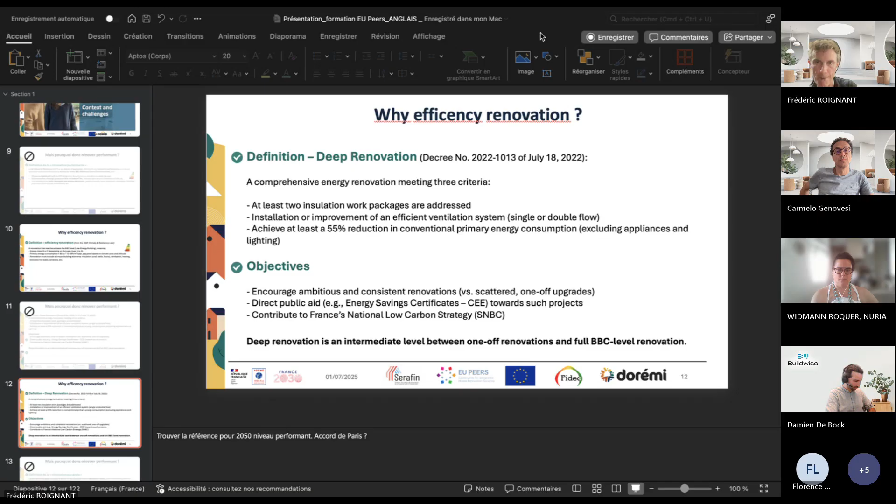We have a technical issue with slide sharing. Frédéric asks if we are still on slide number 2, and confirms it should have changed. After some back and forth, the presenter tries to share the document again, checking whether slide 12, then 14, are visible, and adjusts the window being shared until everyone confirms they can see the correct slides.

Thank you everybody. So I was telling that there is a second definition, which I call deep renovation, which is a little bit different from the first one. Here you will see we just have two insulation works, whereas in the first one we have more, 4 or 3, 1.

It's the question of the ventilation system. Here you have the choice between single or double flow, and we have a criteria of improvement of the reduction rate for conventional primary energy, which is a little lower than the first definition's objectives.

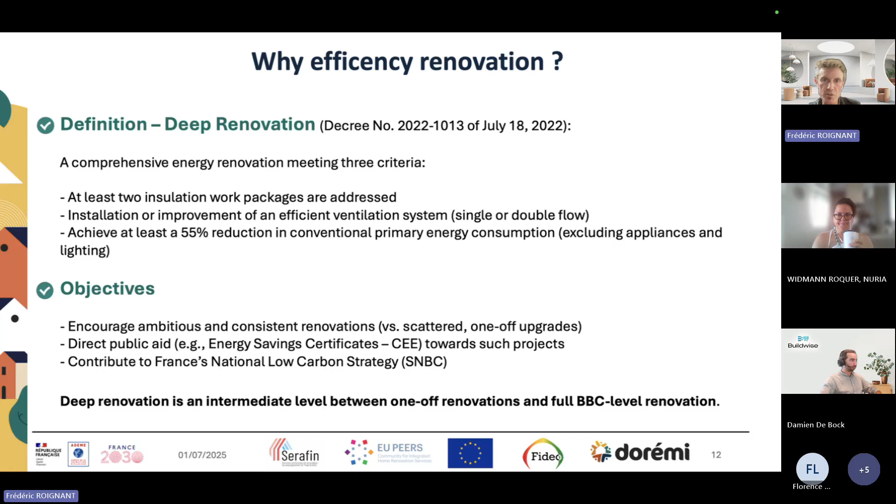On slide 14, you have the definition of the one-off renovation, which is the largest gesture work done for the moment in France. For example, it's just changing a window or insulating or replacing a boiler, but without a global reflection on the work we have to do to reach very high efficiency.

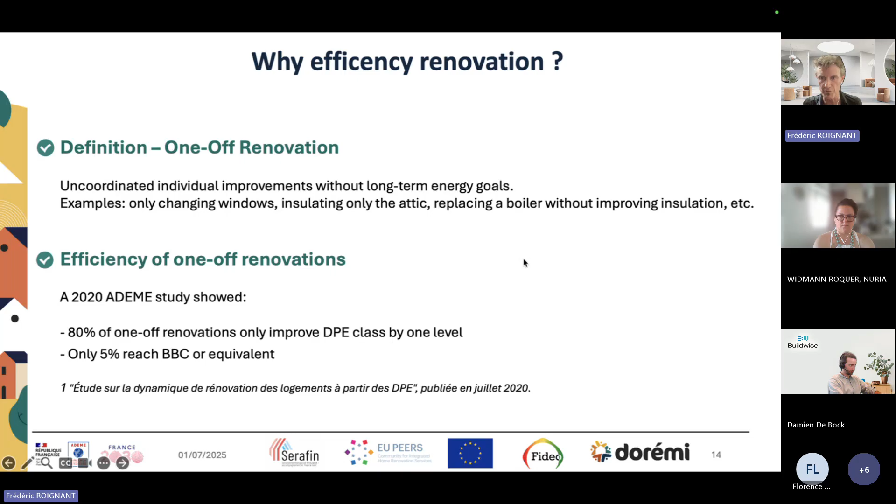For DOREMI, we are not very pleased with this definition because we have a contribution from ADEME, a French institution, in 2020, which shows that 80% of one-off renovation is not capable of improving more than one level on the DPE, the scale of evaluation of improvement, and only 5% reach the BBC level or equivalent. So at the end of the day, we see that one-off renovation work is not the one that has to be continued or supported to reach the climate level in 2050.

So why do we talk about efficiency in renovation? As you can feel today, it is because we are facing global climate change. But more than that, we will also face a social goal. We have a big amount of energy poverty in France, and working to improve efficiency in renovation will create local and non-relocatable jobs here in France and in every country, supporting territory development. So besides the climate goals, we also have social and economic goals, and surveys show that we can expect about 8 million energy...

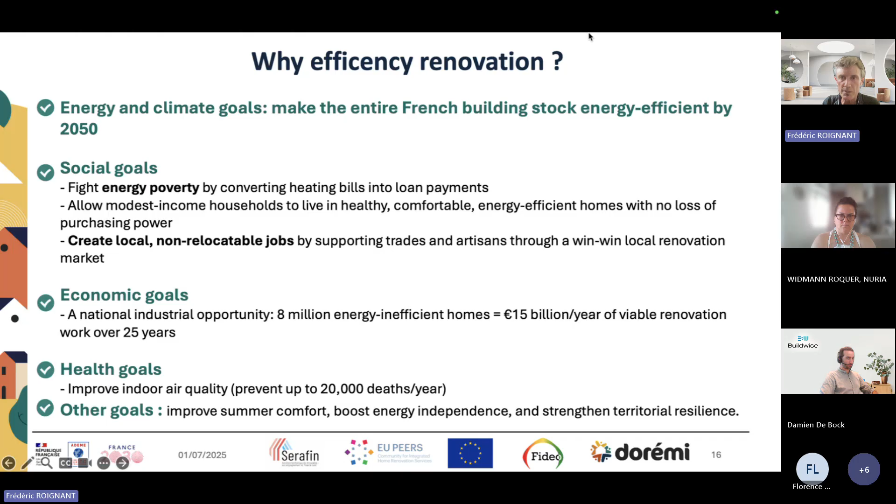This is a major point because we are dealing with efficiency renovation today. For DOREMI, we want efficiency renovation to be accessible for all people when it's well planned, optimized, and well managed. It's not just for people with good revenue.

So we need to regard financial planning and project coordination to ensure we succeed in this work. For us, efficiency renovation means good health quality in the home, comfort, and consuming very little energy.

Now chapter 2. It's not sufficient just to talk about energy in a renovated home, but we want to be sure the energy performance is real when the work is done. So we will see how we are organized in DOREMI to achieve this goal.

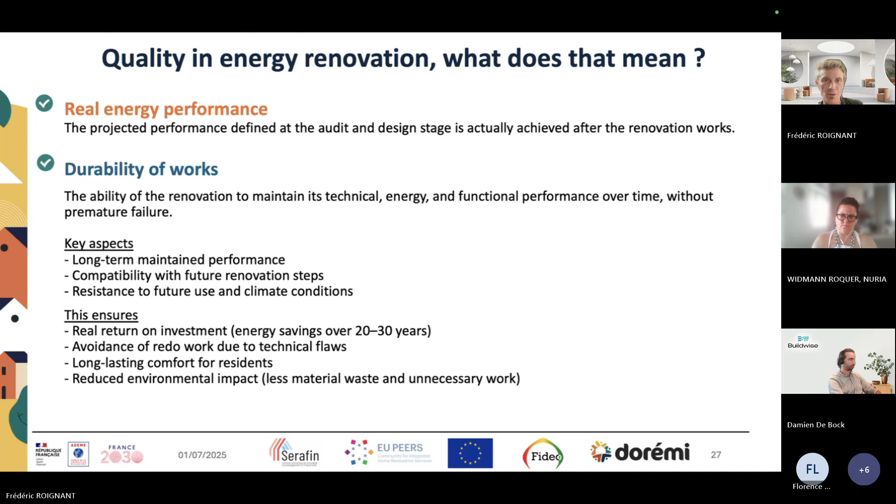Sorry, there is a title in French. This is what quality in renovation means. For the user, it means first of all comfort and a healthy residence.

We know that 30% of households report difficulties staying comfortable in their home during cold winter. We will see there's an increase, because in 2020 the figure was just 14%.

Another point is satisfaction from the user's point of view. For them, this is the first priority, coming largely before other aspects like green space or urban development. So this is a very important point.

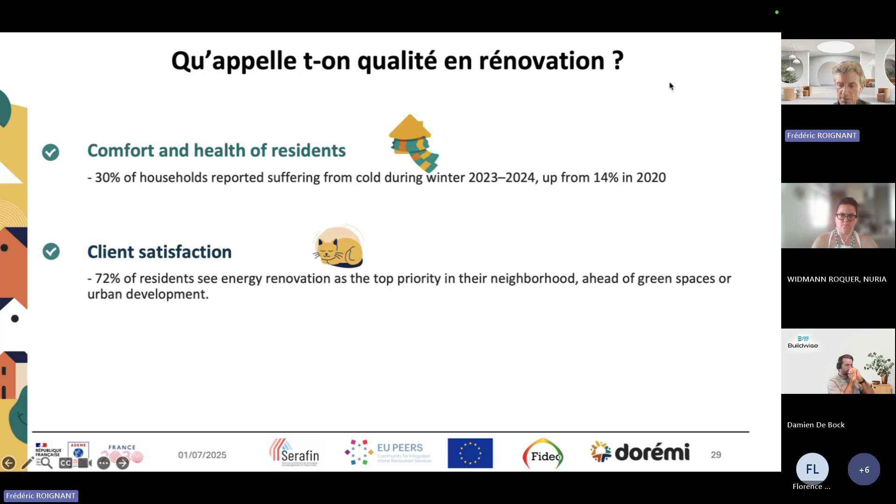Let me talk about DOREMI in a few words, so you understand how we are organized. We are part of a larger group, the Negawatt group. We were born in 2017, coming from the Negawatt Institute, a kind of think tank thinking about transition in a global point of view for France, energy and environment, and changing society's way of thinking.

The point is DOREMI was created to face the demand for renovation, essentially in old houses. We are independent, but also founded by great companies like Schneider or Edilians.

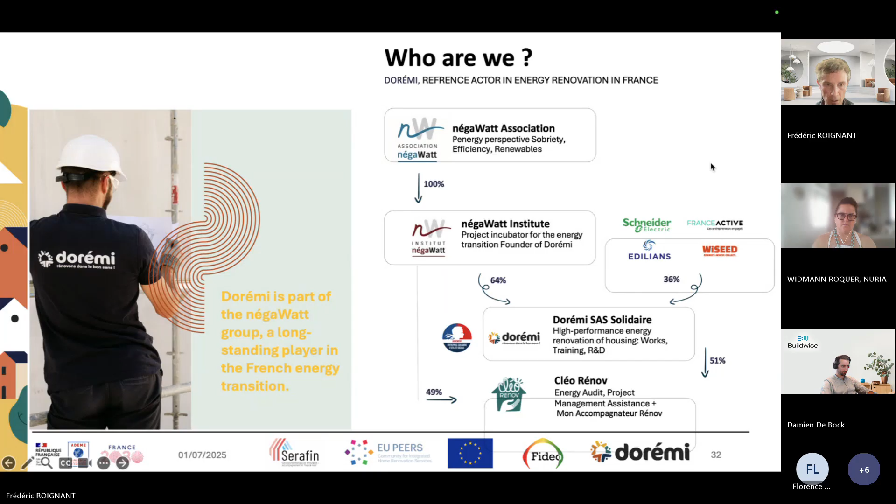The strength of DOREMI is that we are organized in 3 major parts. There is DOREMI Formation, which is training, one of the 3 pillars of our organization. We also have the Lab, which deals with research thematics with partners, French and European. And we have DOREMI Work, which is the field way of doing high quality renovation.

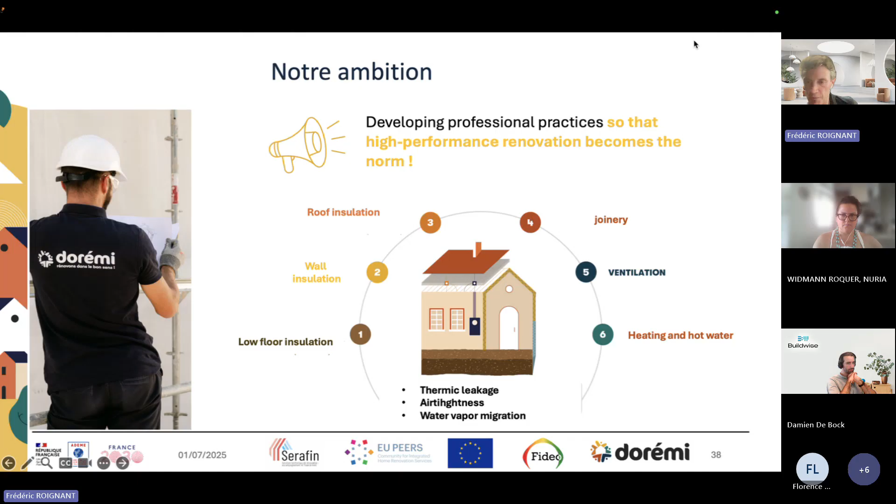This is very specific because this way of thinking about renovation is not widely shared by people in the field in reality. So let's go deeper into how we are organized to do that.

Let's talk about pillars of quality. It's like many proofs of quality. Let me explain one of them.

Based on this scheme, we can reach high performance energy renovation in 2 ways. The first one, and the major one up to this time, is the project in one step. It means we will find fundings, technical solutions, and have no blocking from the households.

These are the 3 conditions which make it possible to do high performance renovation in one step. When the context is okay, it's the major way to work, but it's not 100% possible. So we choose to have another solution: a high renovation project in 2 steps.

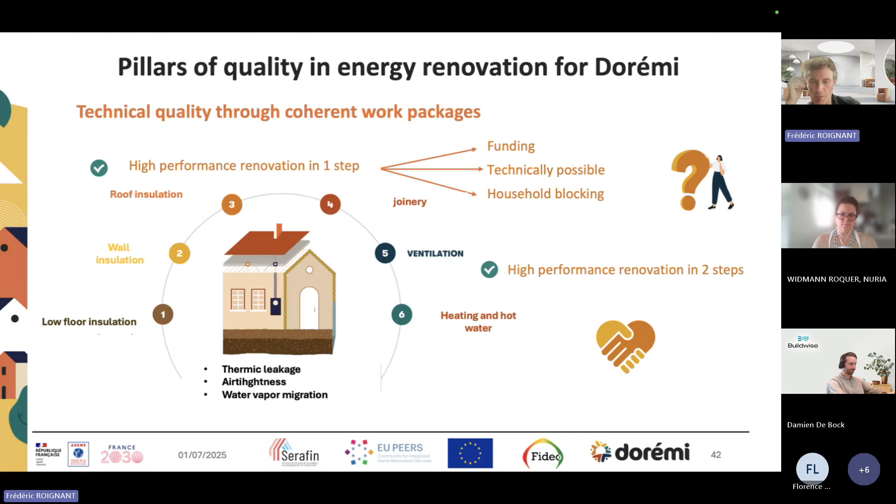For this second way of doing things, we made a study with ADEME just to know how we have to proceed. The result of this study shows that it's possible to do a high renovation energy project in 2 or maybe 3 steps, but not more, because the curing of the wall is needed from the beginning.

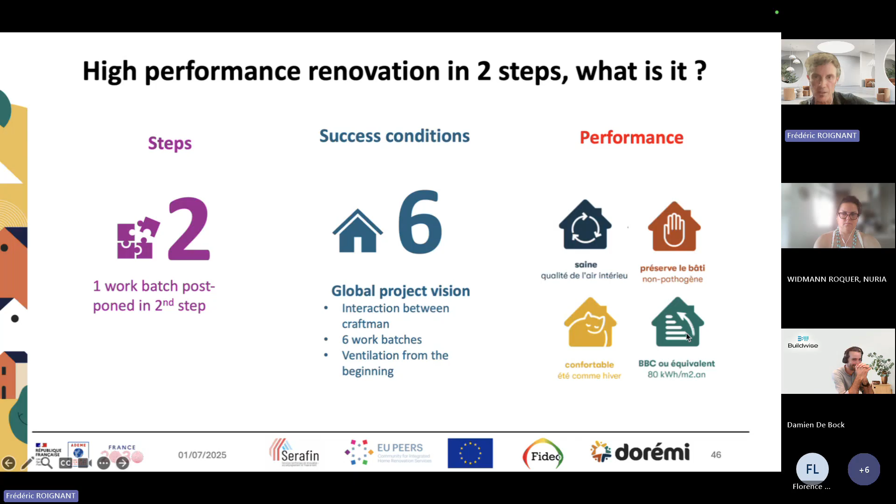To sum up the conditions needed to have performance in work over 2 steps: we need the 6-pack of work plus the interaction between craftsmen, which is very important to ensure quality. We know we have to treat the ventilation from the beginning, because once it's networked, it's more difficult to make the work at the second step. If we have this condition, we know we can reach the same performance as if we did the work in 1 step.

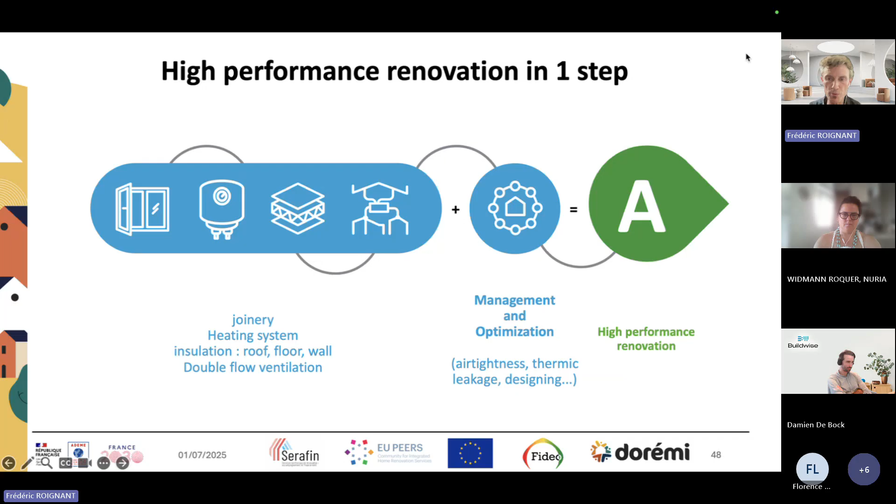So, another scheme. The conditions to get high renovation performance in 1 step are these: this type of work includes joinery, heating system, insulation, double flow ventilation, and 3 more things: air tightness, thermic leakage, and designing.

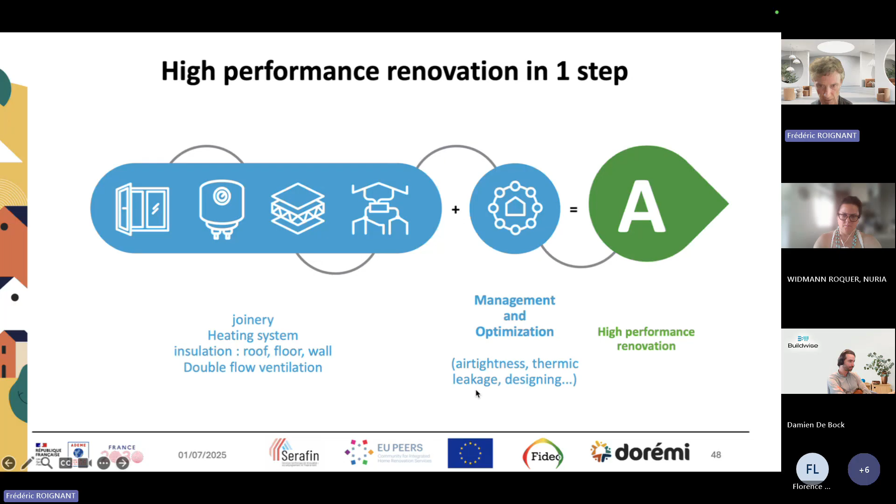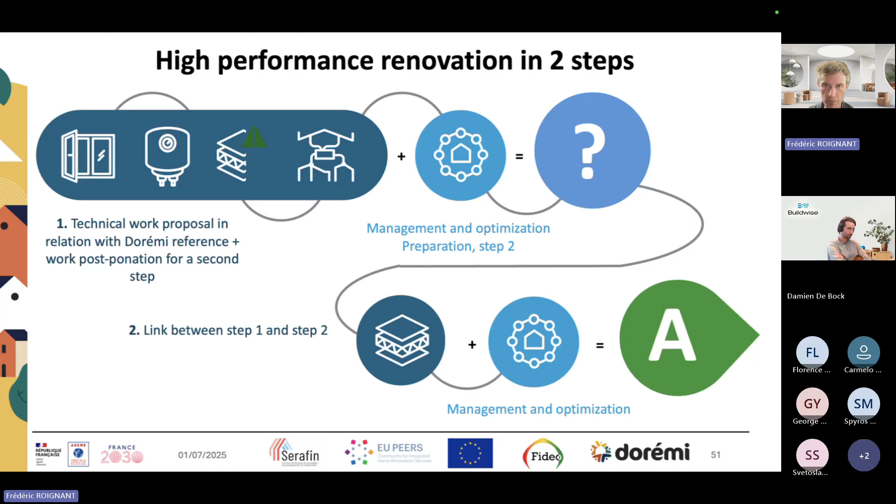If we want to do the work in 2 steps, we'll start with some work, and afterward we have to optimize and make it possible to do the complementary job in step 2. But we have to deal with and design this from the very beginning of the project. So it's more complicated, but it's possible to have the same result at the end.

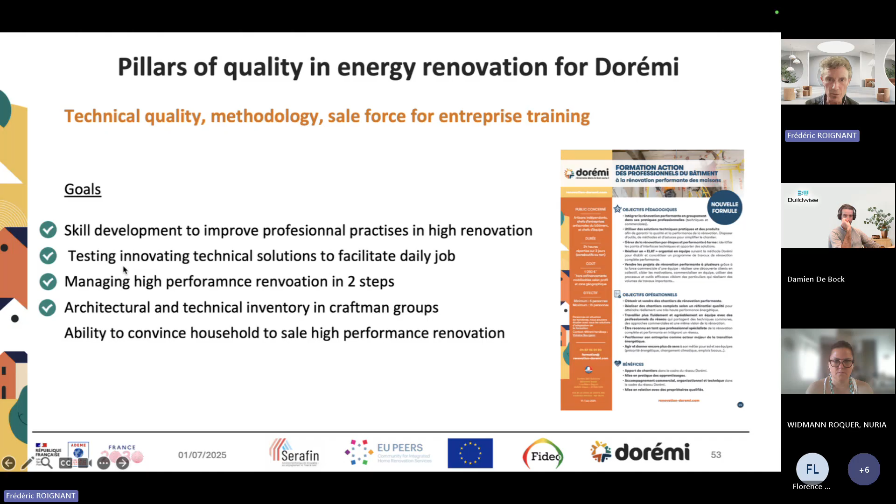We also have the same kind of trainee program, but for experts who go along with them during the beginning of their collaboration with the craftsmen. We know experts, but they are also trainers. This one is a 4-week program. We talk about training, teaching postures, and how they have to be faced with the craftsmen and the household.

And we talk about the way of teaching and managing a group of craftsmen, and sometimes it's not very easy. We also talk about technical expertise, sales, and organization.

So this is another point. We talk about training for enterprise, for teachers, they go with craftsmen. But we also have an organization for household because they want to have someone to talk with during the project from the beginning to the end. So we have a commercial offer which takes them from the very beginning, the first contact by phone, to the reception of work, usually about 10 months or more.

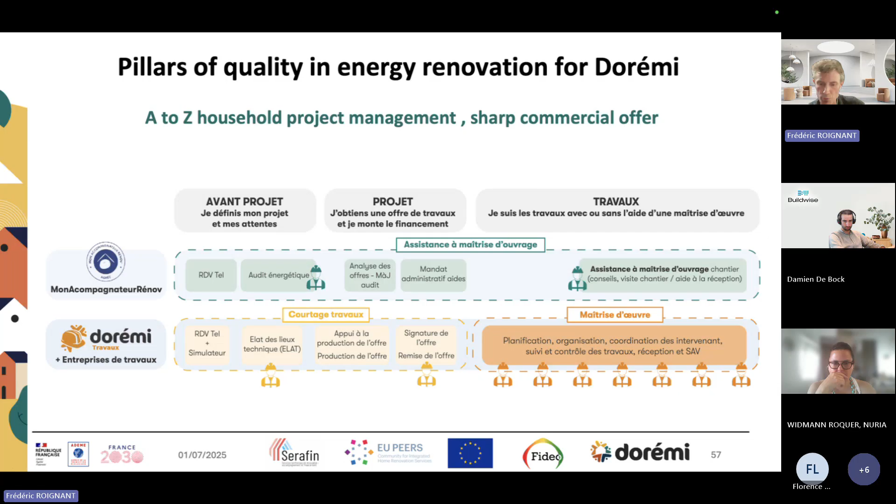Collaboration. So on this scheme, you got, sorry it's in French, but just to show you the different stages, there are numerous, we have to be present with household. It's not an easy job, but it's very necessary to reach quality at the end.

So to show you in another way, in the middle of the slide you've got the household. When the work is finished, they are comfortably settled in their house. But before that, we have to face steps coming from the one on the top left to the one on the bottom left.

So the first one is designing a pre-qualification program in collaboration with the household. Then after, the trainer goes with the craftsman group to design a technical and financial estimation for the work.

Then after you have the step where, after the project is signed, the craftsman group makes the work together, but they are guided by the trainer and the expert from DOREMI.

Before the end of the work, we have a very important stage, which we call the N50 test. It is the way to show whether the airtightness is good or not, and it is the time we will discuss if we need complementary work to reach the expected quality. Finally, the last step is the reception of work by the whole craftsman group and the trainer.

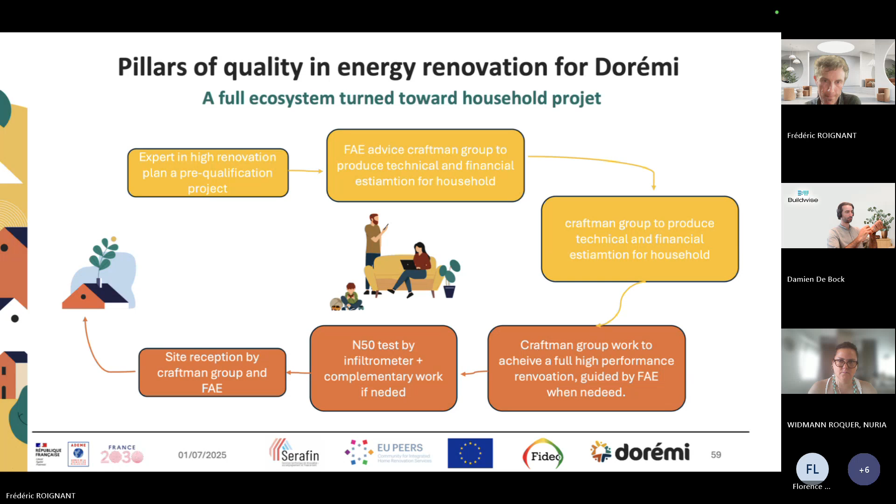So this slide is just to show you the major steps for a renovation project from the point of view of the user, the household. More or less it is the same meaning as the coming slide, so I'm going to be very fast on this one.

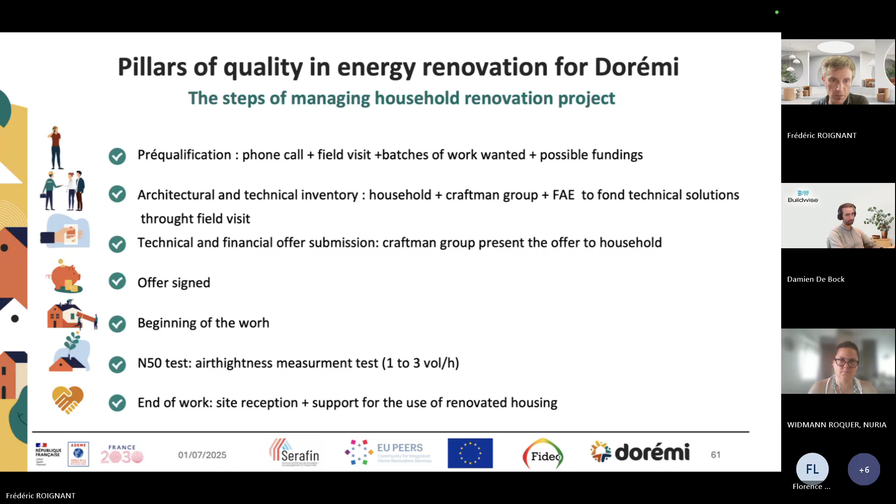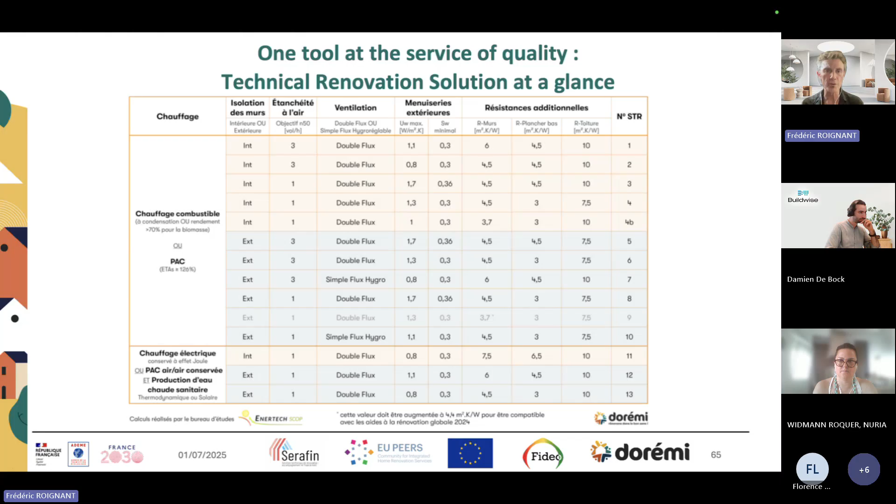Then when you go along, you just have to follow the line, and after you reach a number of solutions, which is a pre-thought way of designing the project. So we don't need to do any long thermal study for this particular project. We know that in this kind of condition, we can reach a BBC level, a low consumption for houses, just by following this grid, more or less. So it is a way to stay simple in engaging work, and this is also very useful to talk with the household.

Another major point for DOREMI is that it's not just designing quality on paper, but quality is made because we are present at each stage of the project. Before the craftsman group makes the proposal to the household, we have control. Before the engagement of the household, we have a control. During the work we have control, one of them being the N50 airtightness test, and we also have control many times during the work.

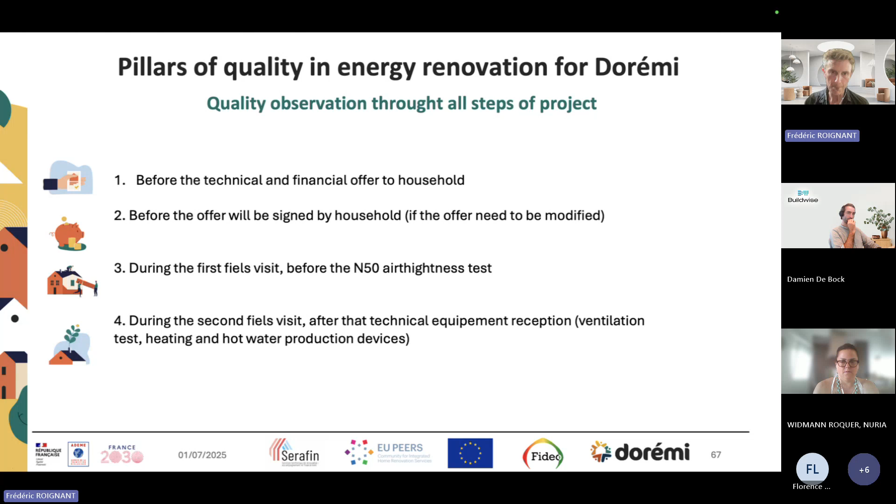We also got an intern software to follow up the project. As you know, we are spread across 5 regions in France, so we have numerous projects at the same time. We need to be very organized to know what's going to happen, who are the projects and where they are, to make adjustments if needed. This software, called L'Appli, is just an intern software, but I want to show you how we are organized on this side.

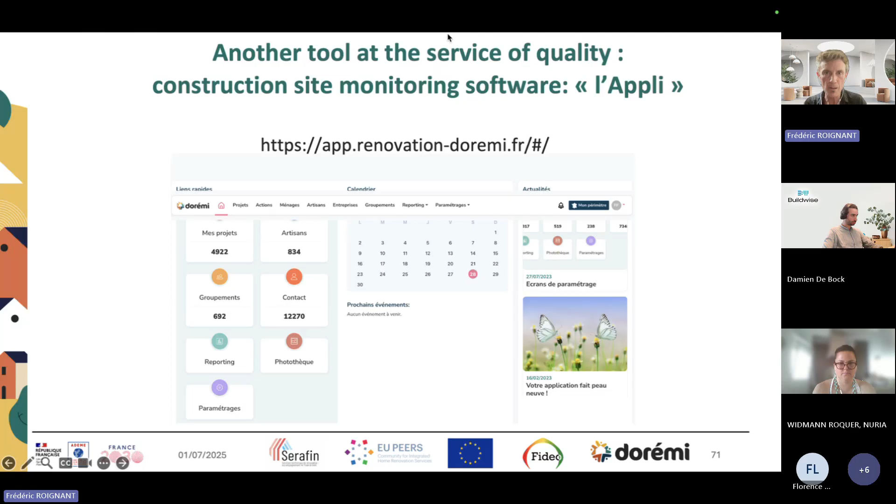Okay, so I have to just, sorry. I'm going to make a jump to this software, if it's possible, and I'm going to share it with you just after. Okay, where is it? Tick-tack, tick-tack, here. Okay, just a few moments please. Okay, so it doesn't work. No.

Okay, here we are. Okay, so let's try, I'm not very good with sharing documents. Do we see something different than before? Yes, no? Yes, it's perfect.

Okay, thank you. So here you've got the project. I'm not going into detail, just a quick overview of the software. Here is the list of projects we are dealing with at the moment. I'm choosing this one, so you can see an organization.

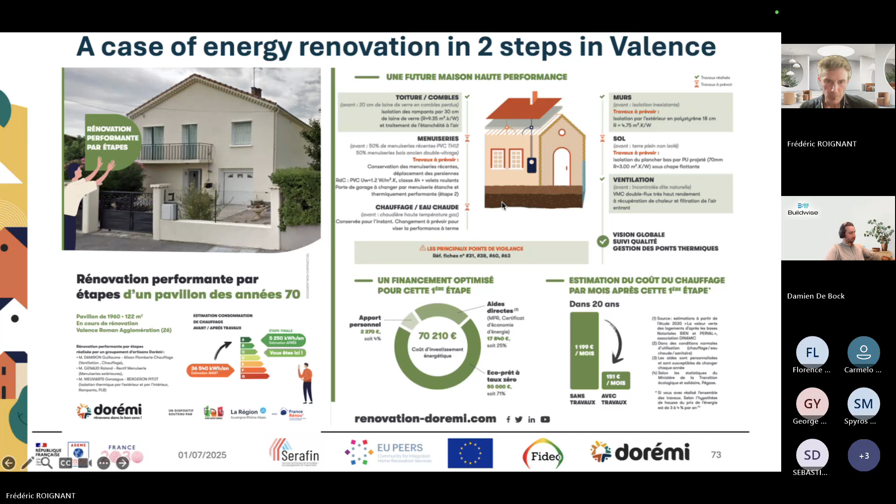Here you've got the detail of the type of work designed for the first step in black, and in red for the second step - so this is a case where it was not possible to do renovation work in one step. This document is discussed with the household, and if needed, there are references in red and black to a technical guide they can refer to if they need to go deeper in understanding the technical work they are going to have.

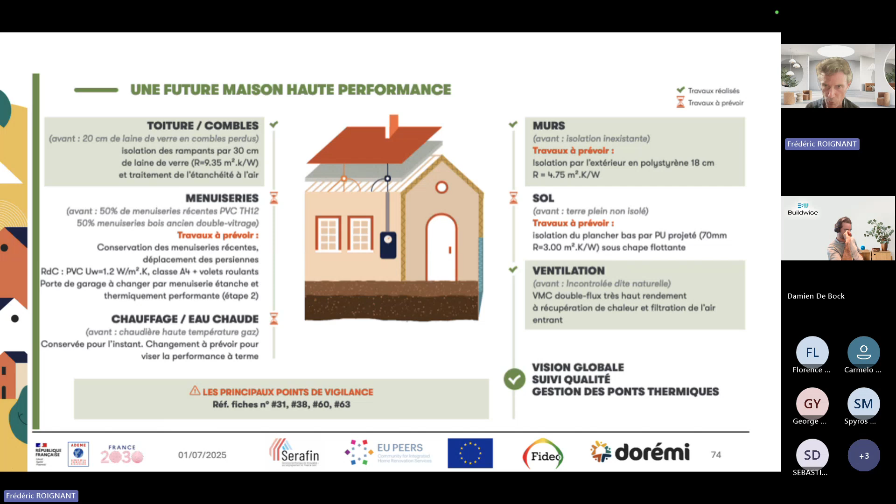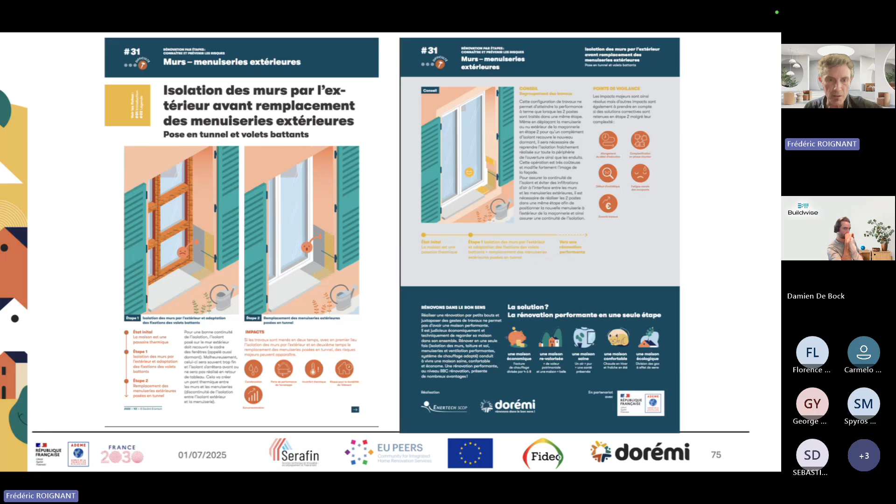For example, these guidelines are those ones. They are free on a website, you can download them for free. There's a version for the household, and a version for professionals. This one is for joinery, this one is for insulation in one typical case, at this point between wall and floor.

You've got also another type, and you can search by a number that links the website guideline to the document I showed you before.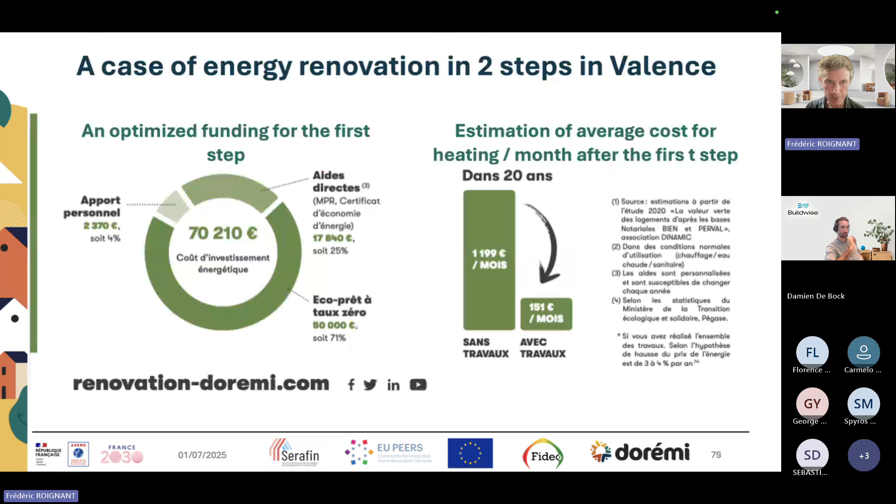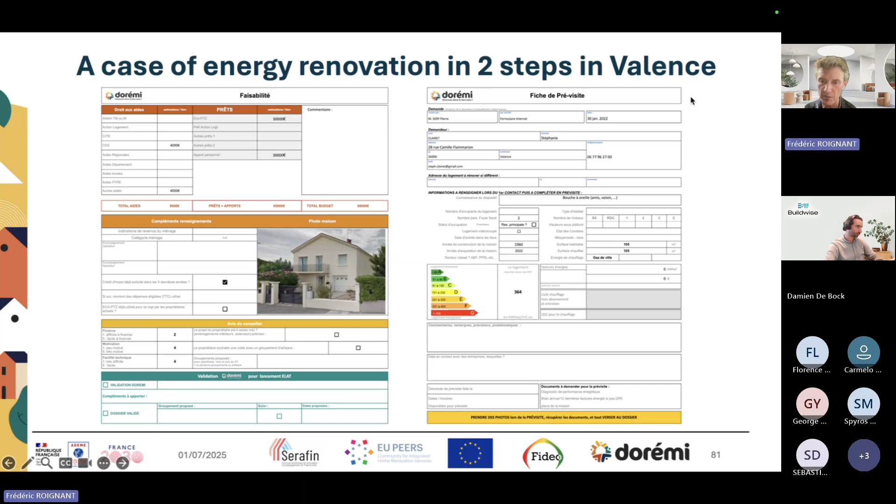This is the same but bigger, and this is just to show you we have an intermediate grid to have a view at the beginning of the project of what is designed. This is the first step to share with the household what is designed for their house - it's a way to communicate and to engage them, to get them moving through the project.

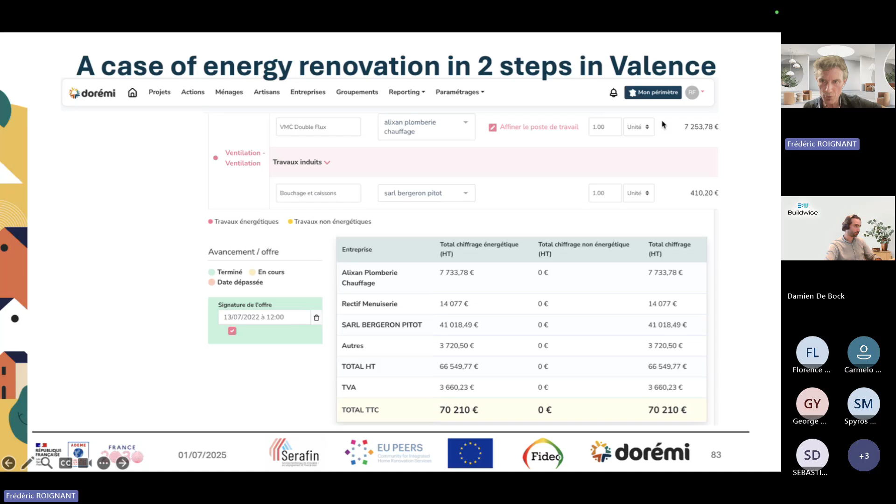Okay, so just some figures coming from the software, L'Appli, that I showed you before - this is the same, so I'm going fast. And now I can deliver you some results of the global way of doing work in DOREMI.

We have some intern surveys just to stay close to the market, concerning the years 2022 and 2024. The first figure is that renovation in one step still remains largely more numerous compared to two-step renovation work - it's like 75% for the first one. The average surface of houses we are working with is 120 square meters.

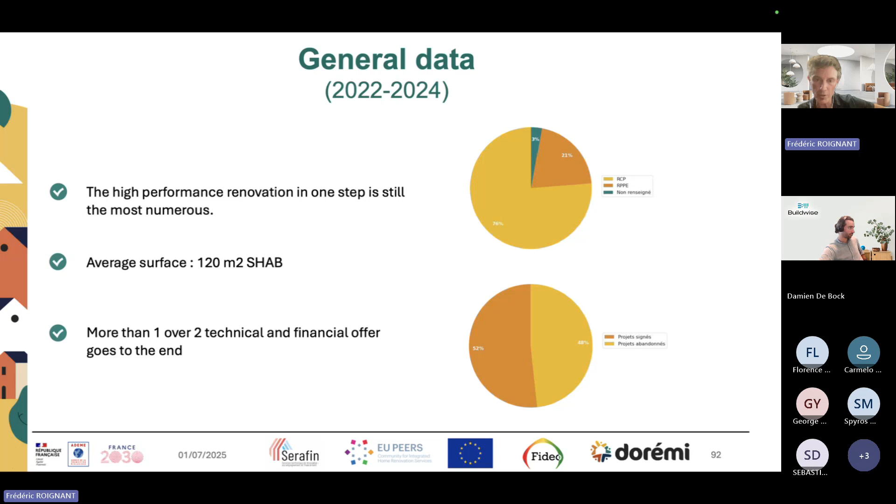We got a good transformation rate between the step of technical and financial proposal to the realization of work. This figure is very important for craftsmen because they are more or less sure to have the work when they go with DOREMI.

Now let's look at the reasons why sometimes we can't do the work as expected. The first reason for abandoned projects is failure on the budget side, about 30% of the whole. The public we work with, for the most part, is what we call modest or below revenue, coming from a grid spread by ANAH, which is a French regulation agency. So we are not working just for rich people, and this is very important for DOREMI also.

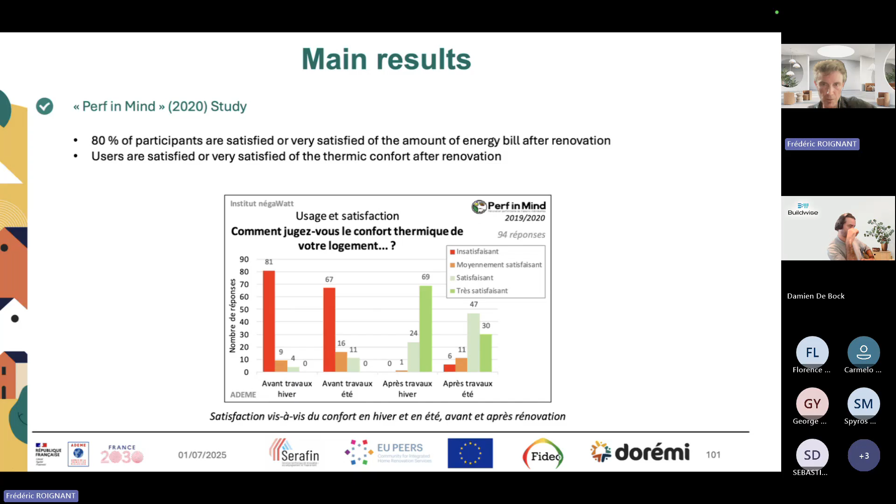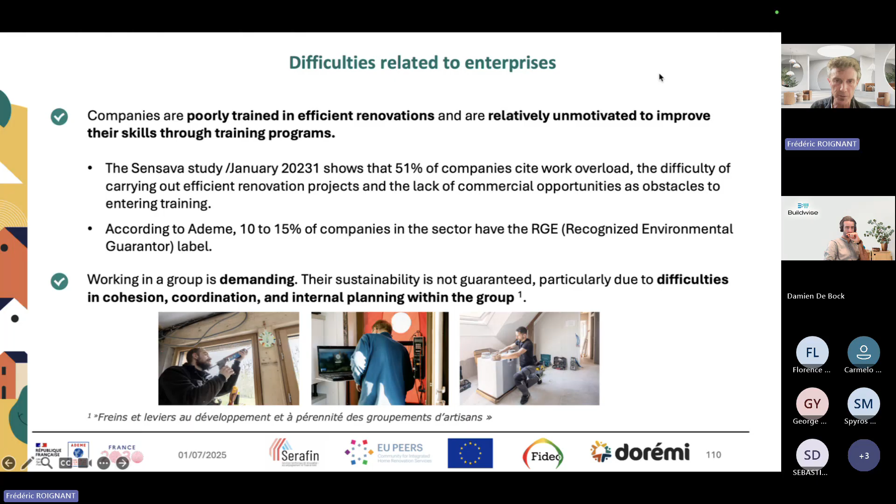So what's going to happen in the future? Prospects for development: we are working on rewriting our renovation toolkit. The goal is to make it more friendly to use in the field. These are guidelines to be used by craftsmen on site, an internal process of DOREMI just to make it easier to use for people at work.

For training, we want to develop more operational training in the field, because they don't want to leave their tools—they want to stay focused on the field work. So we have to develop this kind of training. We can also push on the diffusion of return of experience, just to deliver a very deep message to the craftsmen. And we can also work on recognition of quality as a label, like a DOREMI label, just to encourage and make visible the quality developed on our projects.

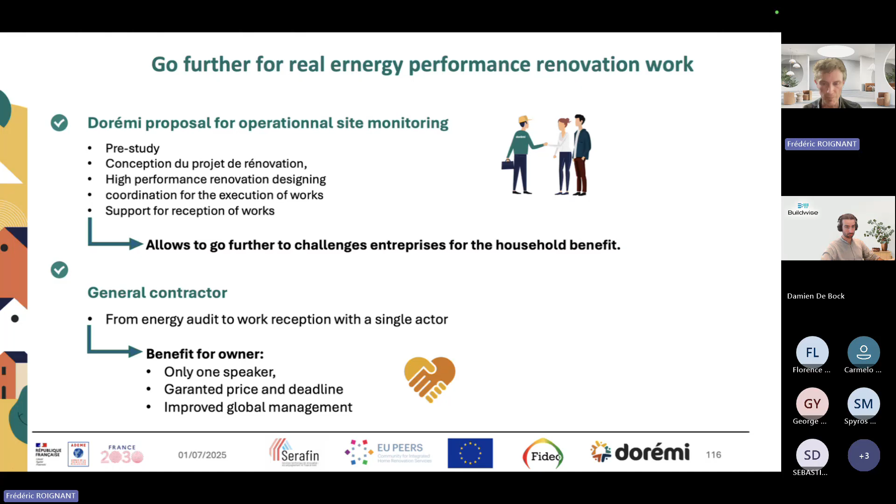Finally, the last part of the presentation: what DOREMI brings to OSS. In a few words, we have concrete field experience based on hundreds of high-performance renovations done, with very concrete results, and a framework which has, in my view, reached a maturity level. We have a standardization proposal for the renovation course, beginning with the first phone contact through to reception of work, divided into two blocks.

The work on the right, and the pre-qualification and pre-study work on the left. We also have experience in professional skill development, training more than 1,000 people a year. Moreover, we have an integrated, reproducible approach, centralized around the user, with a lab research pool, with a changing way of thinking alongside Institut Negawatt, with Cleo Renov, which is the structure to help fund projects, and with work dedicated to quality observation.

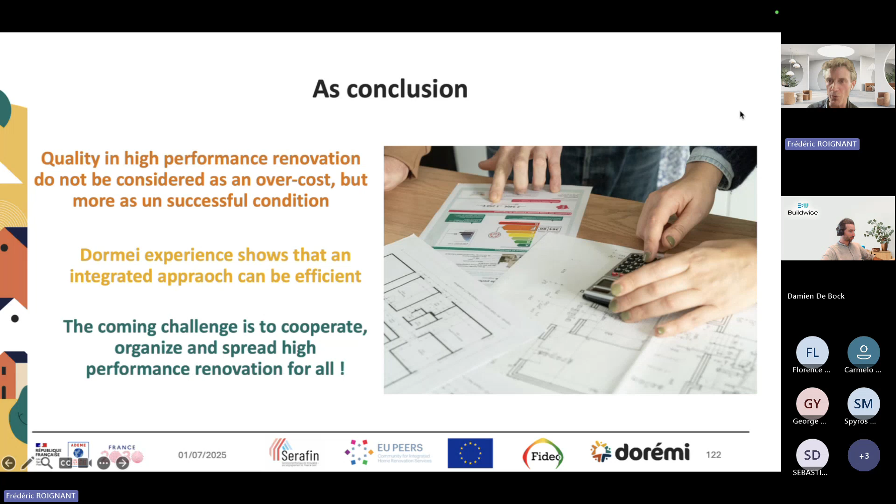As a conclusion, we can say that quality for high-performance renovation should not be considered as an extra cost, but rather as a condition for successful renovation. For us, the coming challenge is to cooperate, organize, and spread high-performance renovation for everyone in France and Europe. Thank you for your attention.